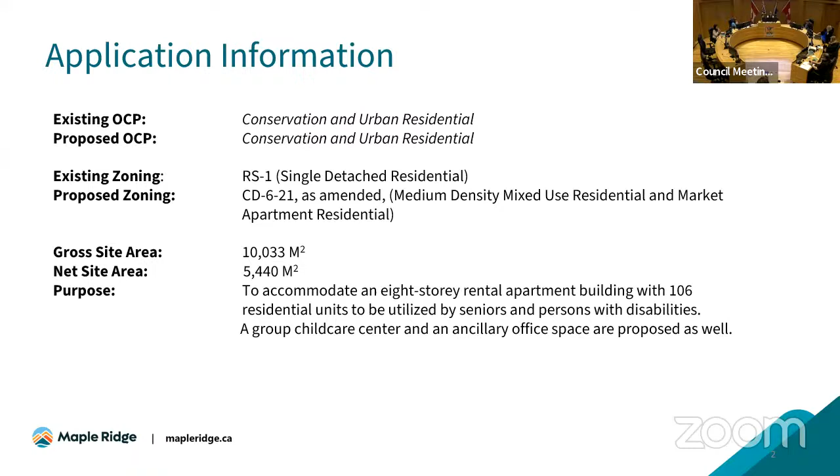Good morning, Chair and Council. The application is designated conservation and urban residential in the existing OCP and is proposed to remain the same. The existing zoning is RS1, which is residential detached, and the proposed zoning is a comprehensive development zone that integrates medium density mixed use residential and market apartment residential. The gross site area is approximately 10,033 square meters, and the net site area is 5,440. There is a substantial environmentally sensitive component to the site. The proposal is to accommodate an 8-story rental apartment building with 106 residential units to be utilized by seniors and persons with disabilities. A group child care center is proposed as well as ancillary office space.

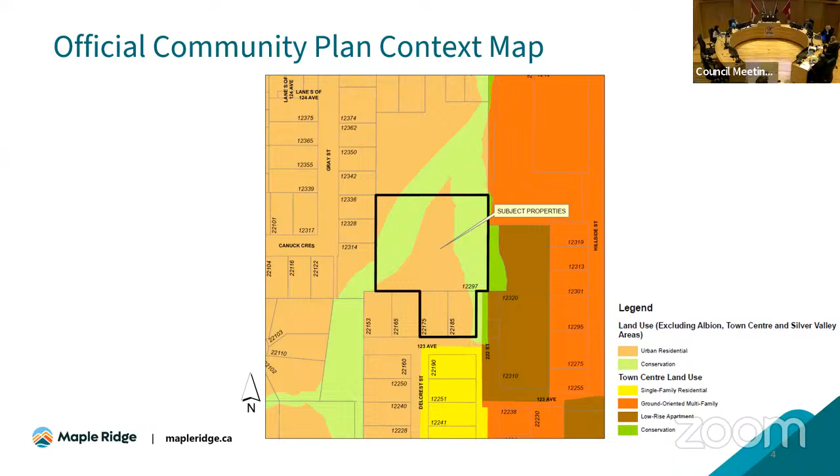Here is the site map. It shows that there are 2 arteries of a major creek running through the site. This shows the context in the community plan, which designates the site as urban residential, and it is bounded by urban residential on the north and by low-rise apartments to the east. Here is the neighborhood context plan as an air photo.

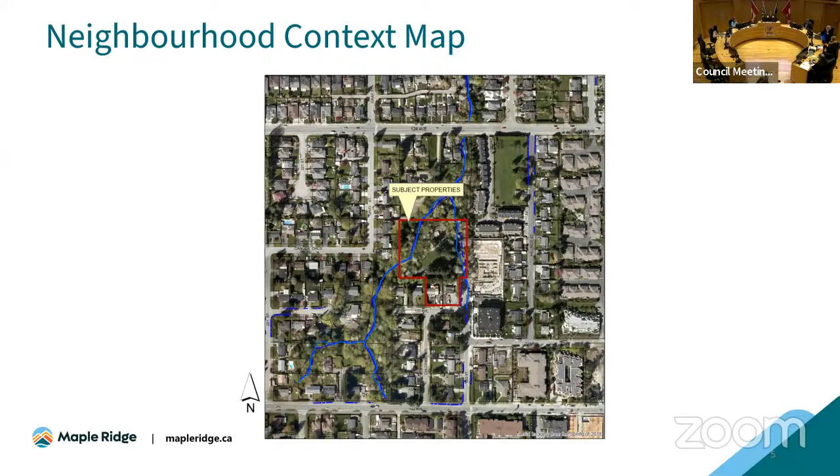There's a history to the site, which dates back to 2021. Originally, an application was received to rezone the subject property from RS1 to a comprehensive development zone that also included medium density mixed-use residential and market apartments. The original application was 7 stories and contained a mix of 55 market rental units and 49 affordable rental units for a total of 104 units. The original application targeted the affordable residential units, 49 towards persons with disabilities and seniors. It also had a component of a childcare facility with an approximate indoor area of 269 square meters to accommodate 36 children.

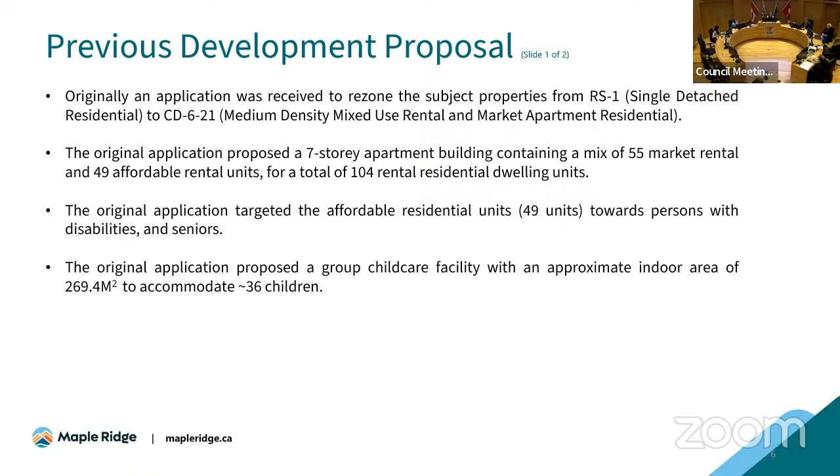This application proposed 114 parking stalls, which was a requested variance or reduction of 77 stalls. On January 25th, 2022, City Council granted 3rd reading to the original application following a public hearing. This application had vehicular access crossing over the Fortis BC right-of-way, and part of the underground parkade structure encroached into the right-of-way. The Fortis BC right-of-way runs east-west across the 2 properties fronting 123rd Avenue, and this is a no-build covenant area because it's a statutory right-of-way.

The revised application is to rezone the subject properties from RS1 to a CD zone. It now proposes an 8-story apartment building with a mix of 52 market rental and 54 affordable rental units, for a total of 106 rental dwelling units targeted towards persons with disabilities and seniors. The subject properties are in the urban boundary west of the town center, designated urban residential and conservation.

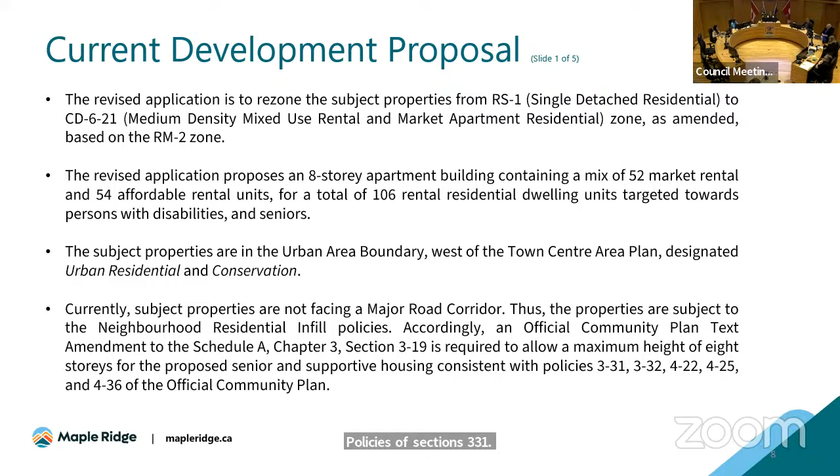It is also in conformity with the supporting housing policies of sections 3-31, 3-32, 4-22, 4-25, and 4-36 of the OCP. Adjustments to the urban residential and conservation OCP boundaries are required, as shown in the attached illustration. The boundaries have been confirmed by environmental consultants, geotechnical consultants, and our staff.

The revised application proposes an FSR of 1.77. It also proposes a group childcare facility with an approximate indoor area of 328 square meters to accommodate 47 children, subject to the support of Fraser Health.

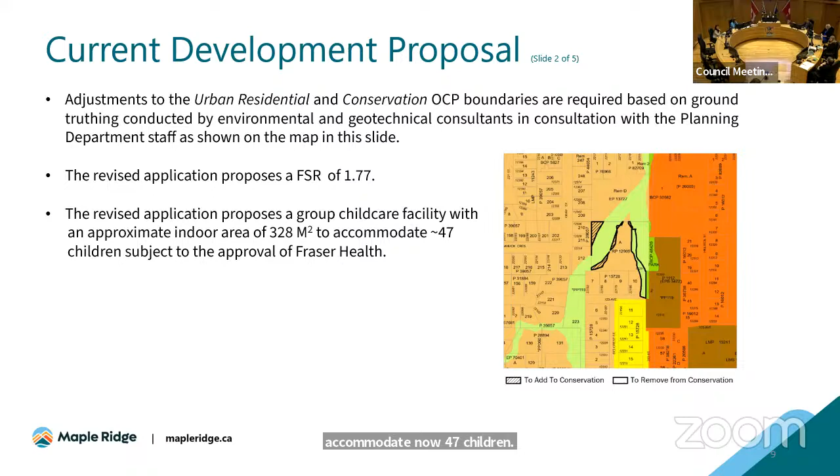All proposed rental units are designed per the CMHC accessibility design standards to be universally accessible. Affordable units will be rented out at the affordable market rate as determined by rent appraisals within the city of Maple Ridge, in compliance with CMHC's definition of affordability effective at the time.

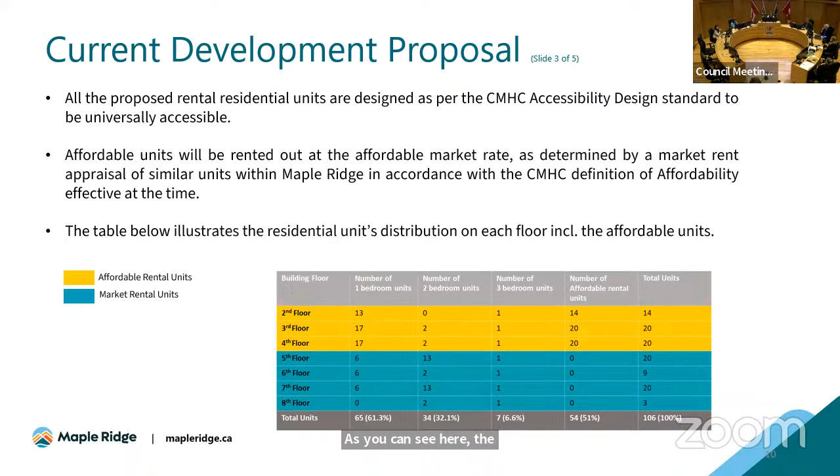The table below illustrates the residential unit distribution on each floor, including the affordable units. As you can see, the affordable units are proposed on the lower floors, and the market-oriented units are on the upper floors.

The vehicle access is from 222 Street. A total of 120 off-street parking spaces are provided on the site, with 26 spaces on the ground level and 94 stalls in the 2 levels of underground parking. The table below details the proposed parking stalls versus current and proposed parking bylaw requirements.

The key point is that under the standard RM2 zone, 203 spaces would be required. Under this proposal, 120 are proposed, a reduction of 83, with a variance of 83 parking spaces requested. While the total requested variance for parking stalls under the new bylaw cannot be determined at this time, the requested variance specifically for the rental residential component could significantly decrease from 75 stalls to 21 stalls.

The subject application proposes 32 long-term and 33 short-term bike spaces, which is in excess of what is currently required.

In addition, the following attributes are included in the design of the building: insulated concrete forms for exterior and interior walls and floor systems, solar cladding to the facade of the building, and a pitched roof system which further accommodates solar panels. Staff recommends that additional charge stations for electric vehicles, powered by anticipated excess electricity generated by the solar panels, be provided by the applicant for future residents of the building.

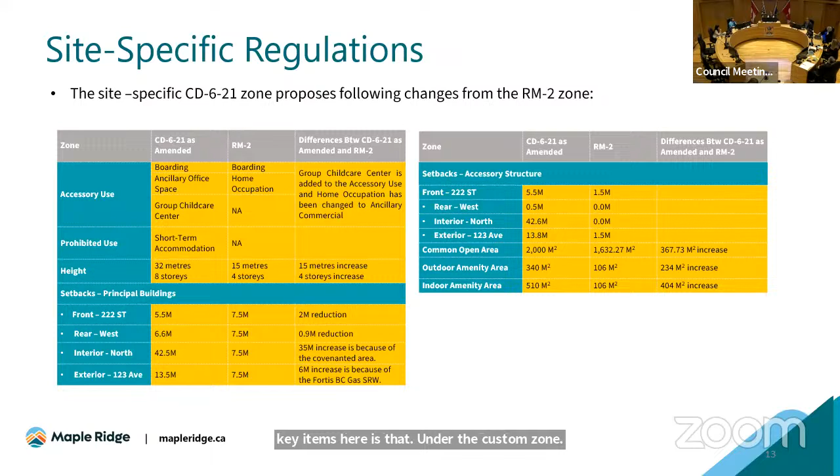The site-specific CD-6-21 zone proposes the following changes from the RM-2 zone, due to the dimensions of the property. The key items are that under the custom zone, ancillary office space is accommodated, group childcare is accommodated, and short-term accommodation is not permitted.

The height of the building is 8 stories, up from 4 stories, and the setbacks in 2 cases are relaxed, with the front and rear slightly reduced, but the interior and exterior setbacks are substantially more than the 7.5 standard.

The proposed CD zone has been drafted to minimize the need for any variances associated with this application. Should any building variances be required, they will be the subject of a future council report at the development permit and development variance stage. A variance to the subdivision and development control bylaw is required to reduce the road dedication from 2.5 to 1.83 along 123 Avenue.

The reduction in road dedication is required due to the Fortis transmission gas main. The requested variance is supported by the engineering department, as the applicant has demonstrated that all required services can be accommodated within the road right-of-way.

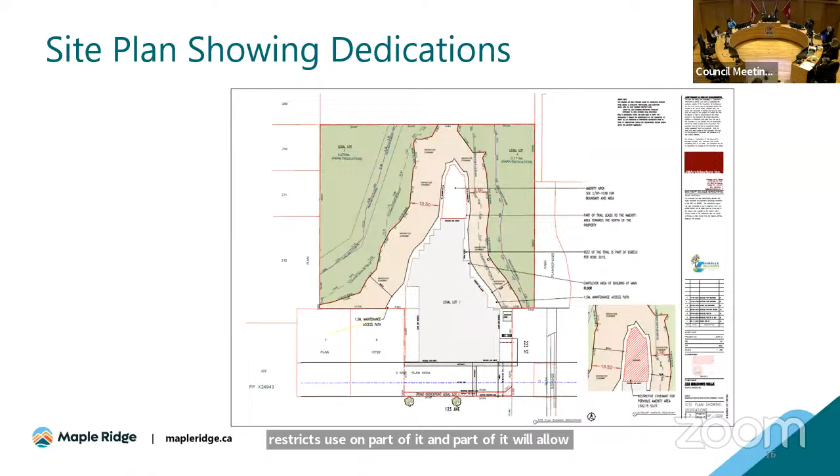There will be a covenant here that restricts use on part of it, and part of it will allow for the maintenance of native planting and to accommodate some on-site stormwater management.

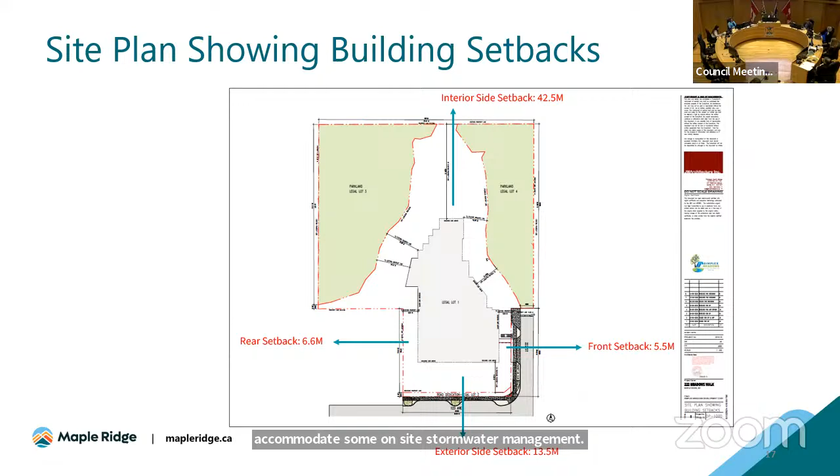A simple illustration of the building setbacks showing the distance to the property line.

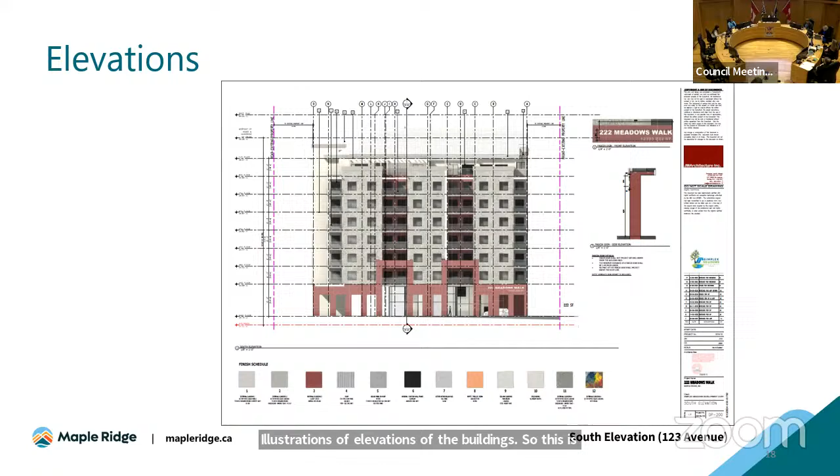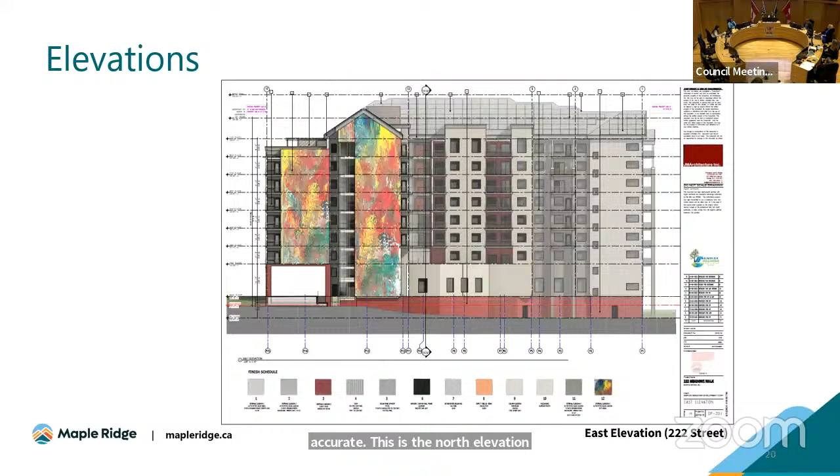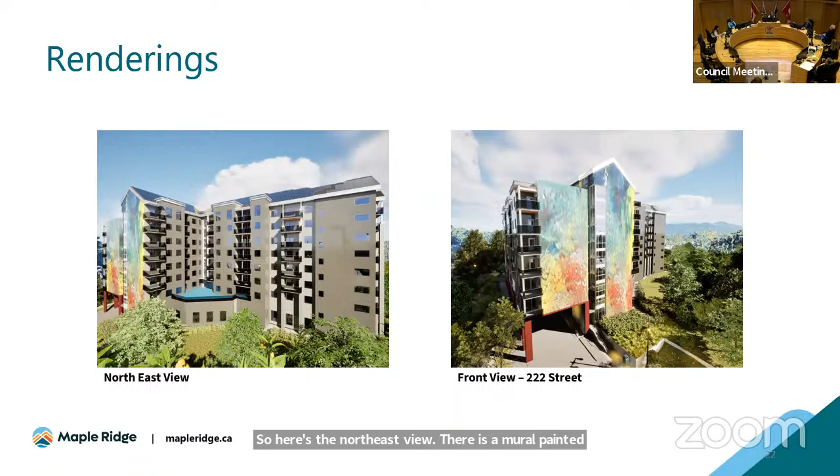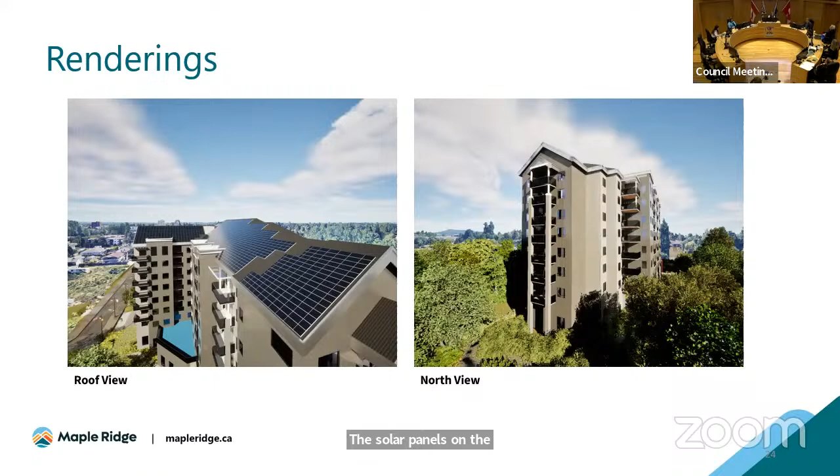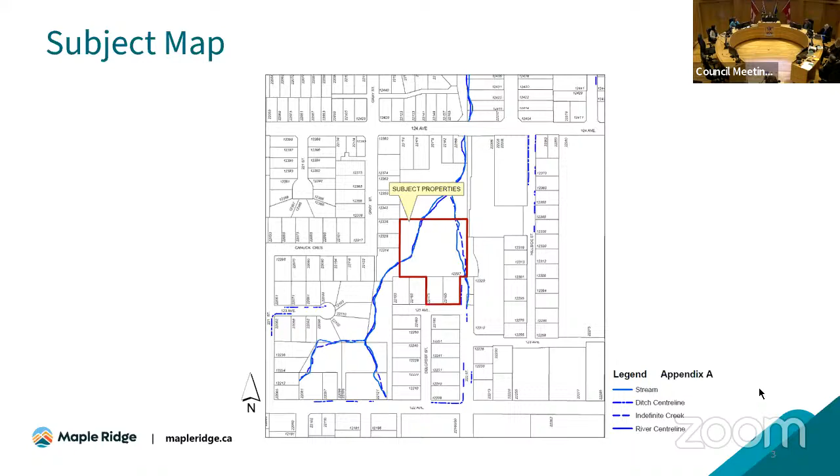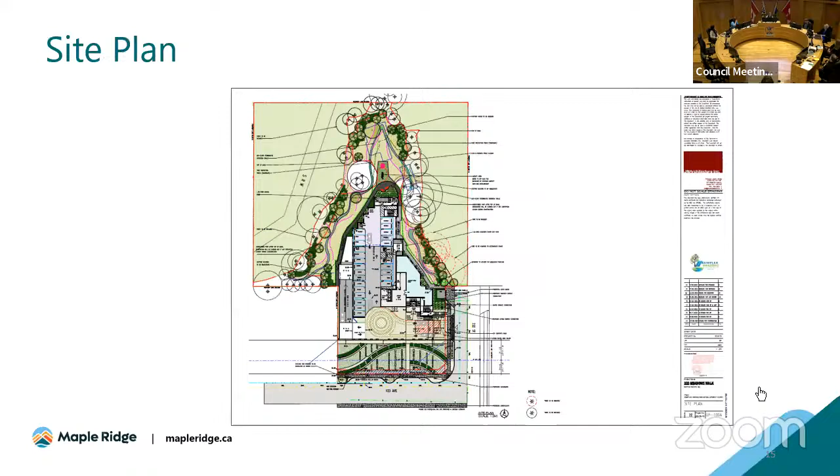Oh, I'm sorry, I'm going the wrong way. I apologize.

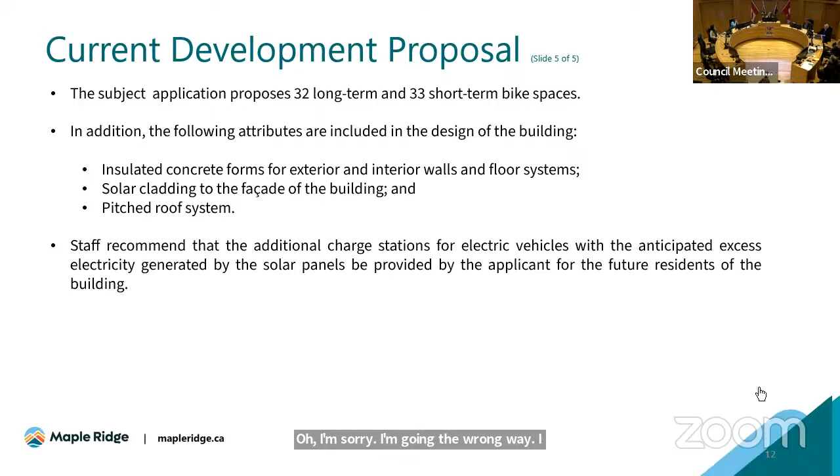In yellow is the current RM2 parking requirements. If you go by the standard RM2 parking requirements, it requires 203 parking spaces. The top line, rental residential units, under the standard zone 159 is being required, and this has been reduced to 100 due to special needs. Under visitor, 22 are required and 6 are proposed. Group childcare, 17 required, 11 proposed. Ancillary office, 5 required, 3 proposed, giving you a comparative total of 203 required, but 120 is being provided, so there is your difference of 83 units.

But under the draft parking bylaw, it has different ratios, and this has not yet been confirmed. That's the bottom paragraph where it says it could be decreased by anywhere from 75 to 21 stalls, but we are processing them under the current standards of the bylaws.

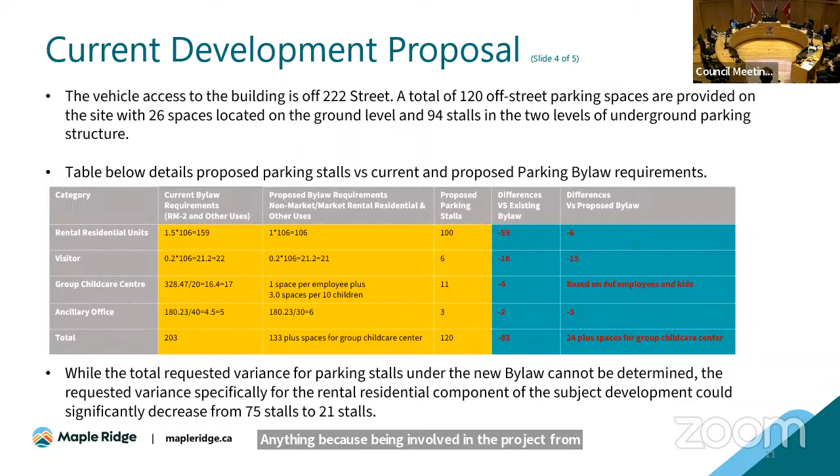I apologize, so there's no misunderstandings. Being involved in the project, there was a reduction of 1.5 meters on either side of the building because of a requirement by fire departments; we need a pathway to be able to walk around the building for fire exits. So that's where the relaxation came about. Before it was 10 meters and 15 meters. That 1.5 meter requirement for fire department safety purposes was reduced there, and we still are under the RAR requirement.

I must thank Mr. Stott, who has worked with my environmental engineer and with our team, trying to figure out a solution, because if we had gone to the standard of 50, there wouldn't even be a doghouse being built on this property. Basically it will crisscross each other and the land would be worthless.

Okay, thank you. Okay? Okay, Councillor Tan, did you have another question? Yeah, go ahead, if that's allowed for a second round, Madam Chair. I think we are done with first round. Yeah, please go ahead, thank you, Madam Chair.

And just wanted to follow up on that point there about the 15-meter setback. I'm hearing the developer's point that there's just not enough land for the 15-meter setback on either side. I'm just wondering, through you, to staff, what else can be done to ensure the viability of the salmon bearing stream, understanding that that's a concern for Maple Ridge residents, since we want to protect our water courses. What can be done here?

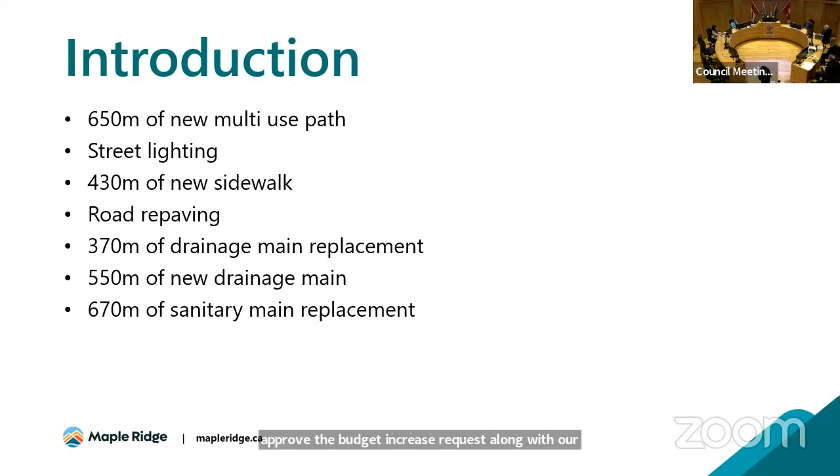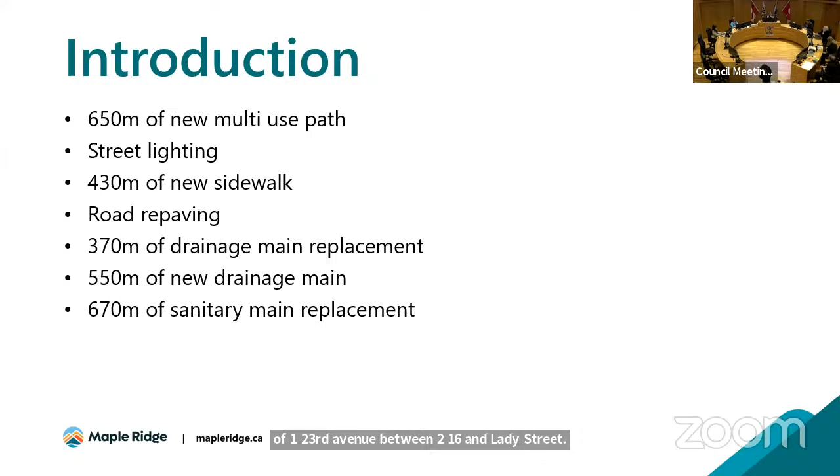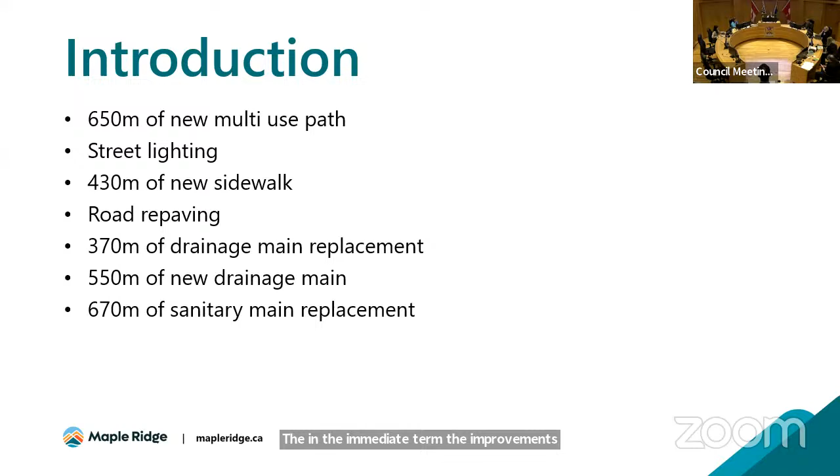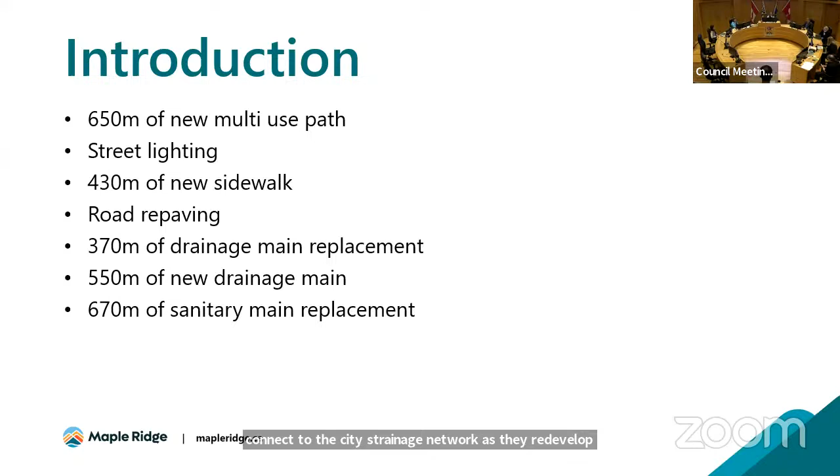The project scope includes a new multi-use path, street lighting, new sidewalk, and road repaving of 123rd Avenue between 216 and Lady Street. We're replacing existing drainage and sanitary mains near the end of their useful life, and extending a new drainage main on 123rd between Creston and Lady Street, where currently there's no drainage main, just a drainage ditch. In the immediate term, the improvements will eliminate the drainage ditch and allow residents to connect to the city's drainage network as they redevelop their homes, or if they wish to connect immediately. By constructing all of this work as one project, we'll leverage cost efficiencies and minimize disturbance to the neighborhood, limiting it to a single project.

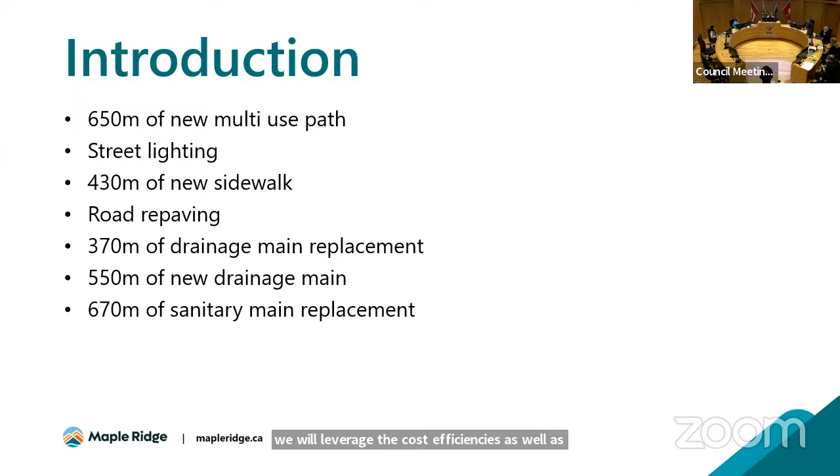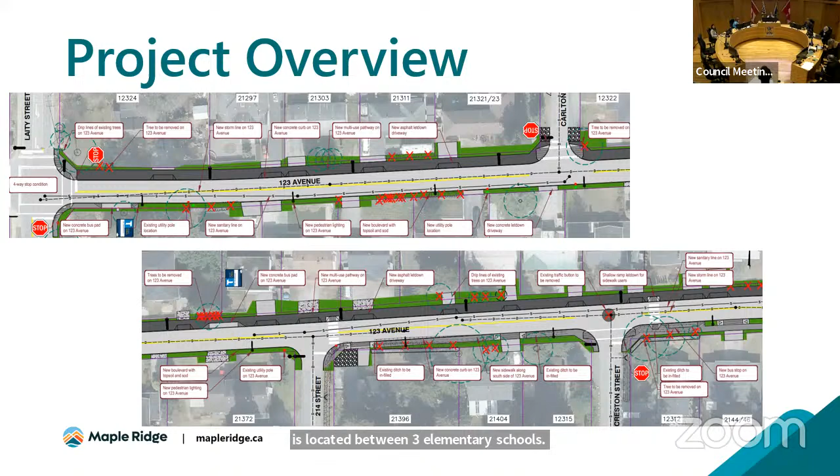Here's an overview of our project scope. The project is located between three elementary schools: Laityview Elementary, located two blocks west of Laity and 123rd Avenue; Glenwood Elementary, two blocks south of 123rd Avenue; and Maple Ridge Secondary, two blocks southeast of 123rd and 216th Street.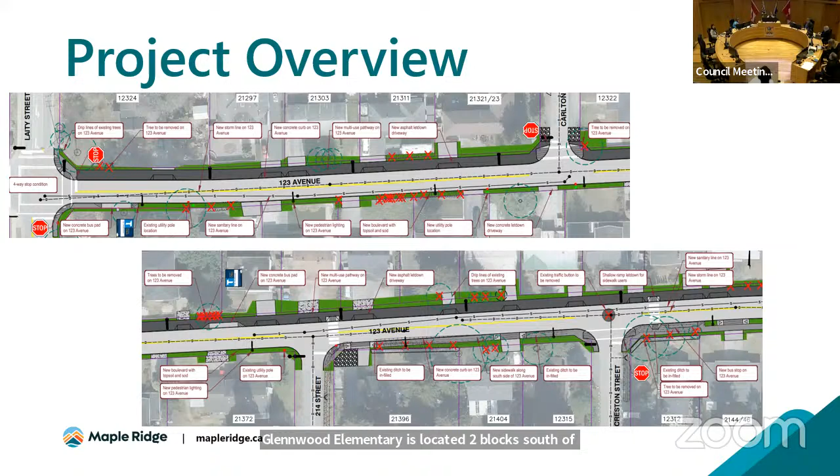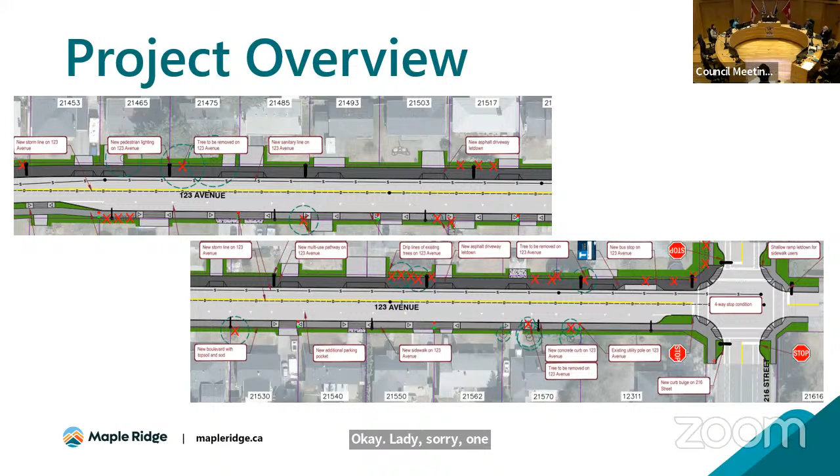123rd Avenue is a collector road that sees considerable foot traffic given its location between the three schools mentioned. The road and pedestrian upgrades under this project will separate vehicle traffic from pedestrians and cyclists, improving safety for both. The 123rd Avenue corridor is identified as a key corridor in our strategic transportation plan, so with this project we'll be creating some of the key walking and cycling linkages within the city.

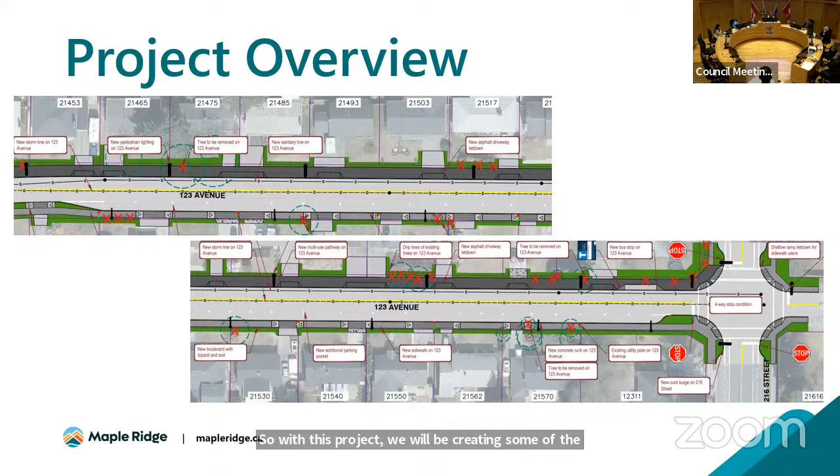In terms of project costs, engineering costs, BC Hydro, TELUS, relocations, City of Maple Ridge Waterworks, and property acquisition will make up about $900,000 of the projected costs. Our construction tender came in just under $9 million, and the overall project costs are anticipated to be just under $11.3 million. This is above our existing budget of approximately $8.6 million.

Some of the reasons we're over budget include that we continue to have an extremely busy construction industry, with continuing escalation in construction costs over the past year. On this project, given that we're in a congested residential neighborhood, the traffic control requirements will be quite a bit more than our typical projects, because we need to maintain access for homes during construction, and that leads to higher traffic control costs.

We're requesting a $1.4 million contingency on this project. That's 15%, which is higher than our typical contract contingency on a capital project of 10%. Reasons for this include that, given we're in a residential neighborhood, the driveway and landscaping restoration costs for projects such as this can vary quite a bit from what we anticipate at design stage.

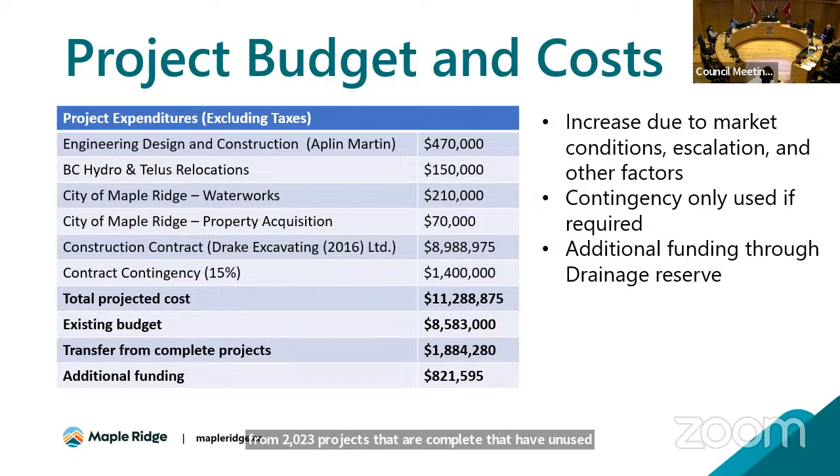That's because the money to complete this project will come via internal transfers from completed projects and additional funding from our drainage reserve accounts. Approximately $1.9 million will be transferred from 2023 projects that are complete and have unused budget, and the remaining approximately $820,000 will come from our drainage reserve.

In the event we're unable to secure the requested additional funding, the alternative would be to build this project in two phases. The first phase would be delivered now within the available budget, once we engage with our consultant and rescope the work. The next phase would be delivered upon getting additional funding in the next financial plan, in a future year depending on which year we identify the work to advance in.

This photo is an example of what the phasing might look like. The exact boundary could vary a little bit. We would have to engage with our consultant to confirm how much work we can complete within the available budget and scope accordingly.

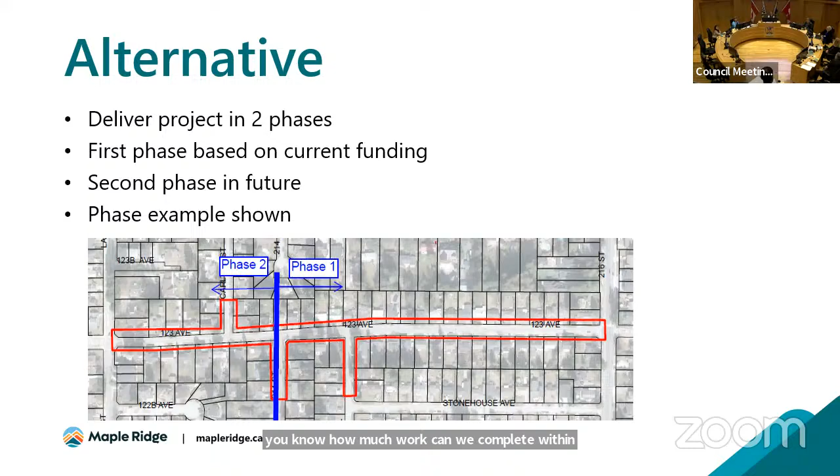Our recommendation is to increase the project budget to approximately $11.3 million as shown here, which will allow us to build the project as currently designed, as one project, minimizing disturbance to the neighborhood, and take advantage of the cost efficiency of delivering it as one project. That concludes our presentation. I'll be happy to answer your questions.

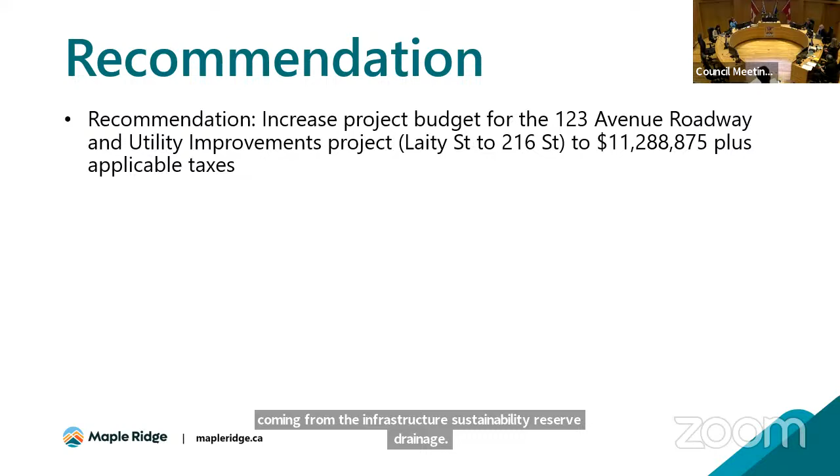Through the chair, essentially they go back to the reserve that's noted and are available for future projects. Thanks. The 821,000, which is the additional funding coming from the Infrastructure Sustainability Reserve drainage, was that already identified for anything, or was that truly just extra funds that haven't been identified for anything?

Thank you. So the Infrastructure Reserve for drainage, this puts it oversubscribed in 2024. However, there's available funds in 2025. So given this project spans several years, as many do, I'm not concerned from a cash flow perspective, but there is capacity in 2025 to fund it. So there isn't the capacity in 2024. We're approving using funds from a 2025 budget. Exactly, we're basically oversubscribing.

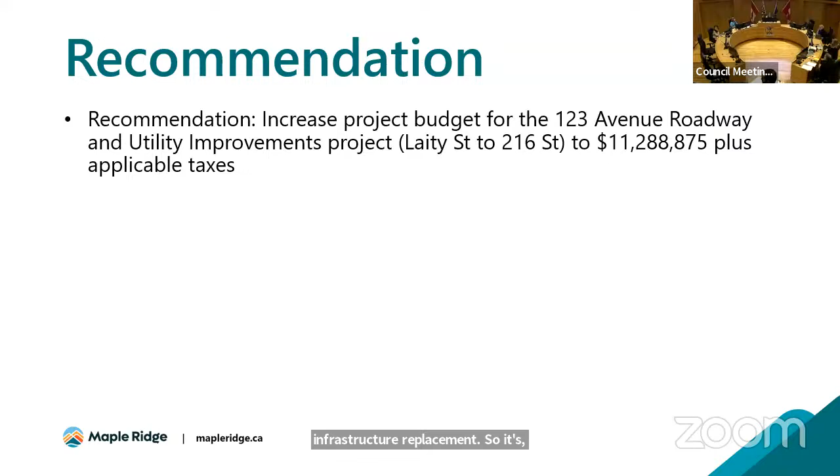Now, the likelihood that all of the projects in that reserve finish by year end is slight. Given that, what happens if we don't have the funding in the 2025 budget? We're committing to this project at this point. So in 2025, it would be reflected in our taxes that we ask the community for? Right, so this is the infrastructure funding that's already in place. It's not an additional tax increase, it's past tax increases associated with the infrastructure replacement. So there is capacity in the existing financial plan. Okay, thanks.

Councillor Tan. Thanks, Madam Chair. Thank you for the presentation. I just want to understand, through you Madam Chair, you talked about a few reasons why there may be cost escalations, like unknown data on the quality of the utilities on the ground, for example. And I just wanted to understand, it's close to a 30% increase in the projected budget. What can we do in the future, as we look at more extensive engineering projects in our community, to ensure that, to the best of our ability, the projected budgets are accurate?

Yeah, so we do our best to update our unit costing information year in, year out. We've retroactively, for the last couple of years, been adjusting budgets for projects according to the information we have on the construction industry at the time. Past or recent projects that we've completed inform our cost database so we can continually update that. We also index costs against posted inflation numbers so we can continually update what a project is going to cost. For example, a project brought forward in a financial plan this year is indexed to the year we expect to build it in, and then the industry changes, the year we're going to deliver that work changes. So every year when we review our financial plan, we take a look at the projects within it and adjust them accordingly. That's the best effort we're able to make to continually adjust those costs.

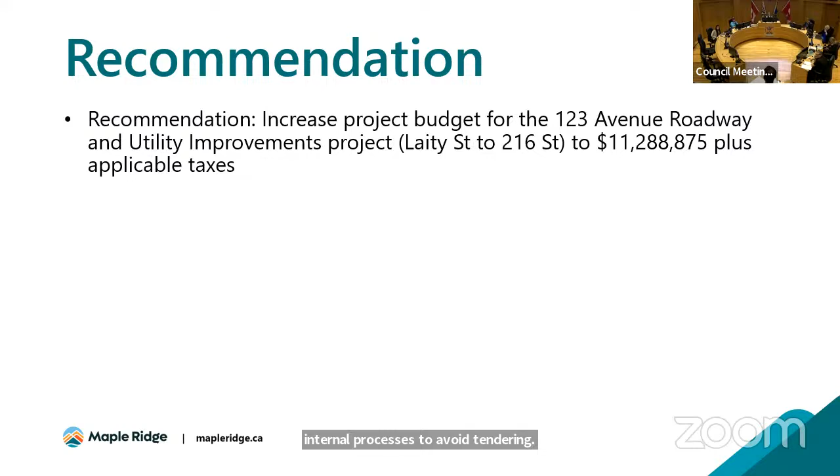Yeah, so we have internal processes to avoid tendering when we have insufficient budget. Normally, and we've done that in this case, our team will work with procurement to post the bid. Part of the requirements to post a bid include validating our pre-tender cost estimate and anticipated project costs against the budget we have for this project. I think we were coming in fairly close to the pre-tender, fairly close in anticipated project costs. Through the tender, we've seen that the tender costs have exceeded our consultant's estimate. So that's one component of why we're over. The other component being, as we've reviewed the project award, we've realized we do need some additional contingency given some of the unique challenges on this project.

Thank you. I think the Director of Engineering wanted to speak to that as well. Thank you, Madam Chair.

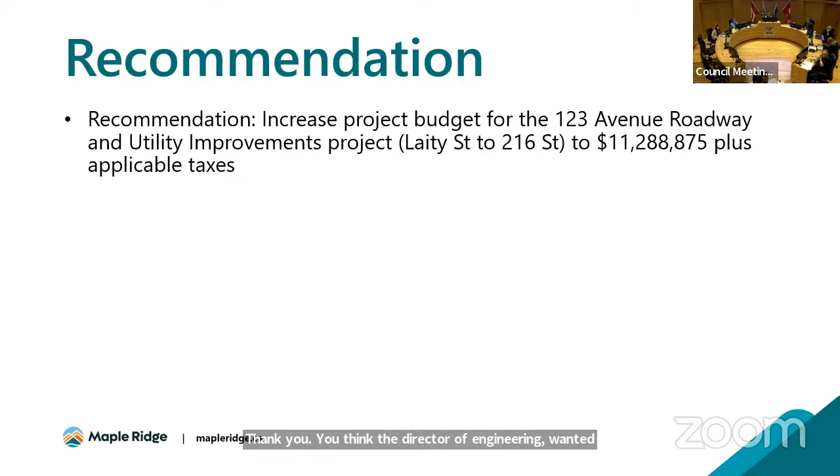Often when we put forward budgets for capital projects, we may be at a Class D cost estimate. Obviously, the further along the design process we get, the accuracy of those cost estimates improves. But generally speaking, Class D cost estimates have a very wide range of -40 up to +50 in their level of accuracy. That's the best we can do with the level of design we are at when we submit capital projects. As we progress through the design phase, that level of accuracy improves to -20, +20, or even better. It all depends on what stage we are at in the design process when we submit the capital budget requests. My understanding for this project is that it was at a Class D cost estimate when it was submitted last year for the 2024 budget.